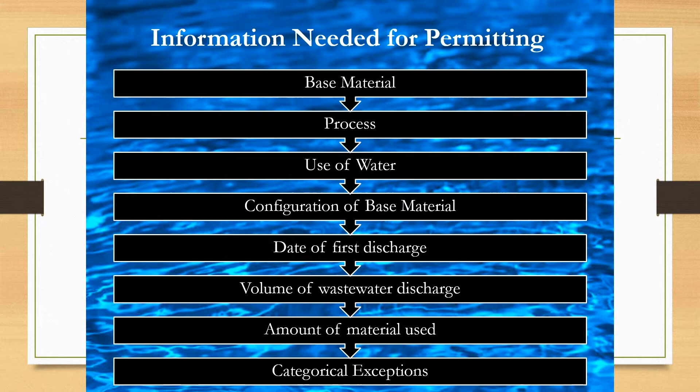One of the things I like to talk about anytime I talk about understanding a business is breaking it down to what you really need to do during an inspection. I like to break it down to the smallest thing, so some of you who have never done it, or have only been doing it a year, understand the basics. One of the most important things is you may need a permit. So you need to understand what you're looking at.

I always like to go over: what's the base material? What process are they going to perform throughout the whole thing? What's water being used for? The configuration, if we're talking metal finishing or what metalers do. What's the date of the first discharge? Is it a new discharge? Is it one that's been doing it for years? Or have they changed their process so all of a sudden it changes that?

Amount of material used is very important, or volume of wastewater discharged, or if there's any exceptions once you understand what you're looking at. Because there are always a bunch of categorical exceptions that some people miss. I know I did, until I was questioned about one of my industries and found out there was an exception, and that's why they fit into that category.

So, of course, I want to go over safety. Slaughterhouses are a very dangerous place. You got knives, you got hooks, and these can be in spots with wet floor, very important. I've seen hooks right here on the ground holding meat and everything else, and it's like, oh, wet floor. That could be an accident waiting to happen. And what I also forgot to include, acids. They're using it for sanitation. So there can be that.

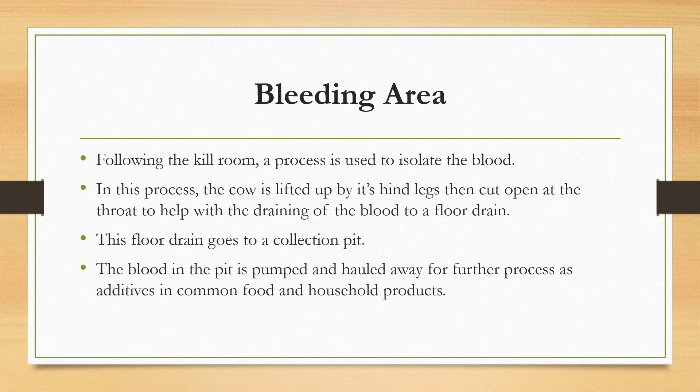And of course, you don't want that down the drain because what's blood high in? BOD. The other thing people don't realize is that's a usable product for them. I really didn't understand this until I took a course on history and economics. A lot of these places don't make much of their profits on the meat itself. They almost sell it for cost. A lot of the other byproducts is where they make their money.

And that's the stuff I'll try to show you and tell you about. So like this, they have a special floor drain that goes to a pit. Like I said, this is the bleeding area. A usable product that a lot of people don't realize is in many of your products already is cow blood. I won't go into it because you can do the research on your own, because some of the products you may not want to ingest anymore.

It's to change color, those kinds of things. But they save all that blood to haul away for further processing. So it is a usable product for them. Next, they will cut off the head. They'll remove the head, and they take it out for testing. That's when you start hearing about these places having mad cow disease, because the FDA is very worried about stuff like that.

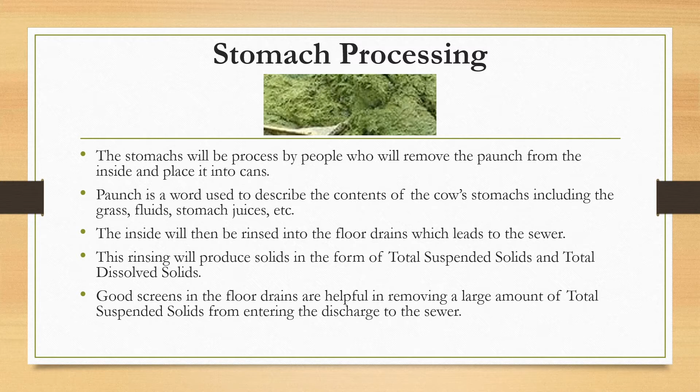One of the things that they do process, at least at my facility, is the stomachs. And they have to, of course, pull all the material out of there. This stuff's called paunch. This is all the acids, all the grass, all the material the animals consumed. It kind of looks like this, as I turn off the projectors. So it's this green stuff. Here's where your TSS comes into play. You've got these fine particles of hay, grass, and other things that these people are feeding them.

Luckily, like I said, now the slaughterhouse has gone away, so we don't have to worry about telling them, guess what, you can't take it from that farmer that's putting that stuff on there. But that can be a concern. And like I said, the TSS is a big deal. The facility I was dealing with had a huge surcharge for BOD, TSS, and oil and grease. And they didn't have much screening in their drains. They weren't capturing enough of this paunch material.

I went in there, saw their floor drains, and I'm like, why aren't you capturing this inside? They were like, well, no one really mentioned that. We have grease interceptors outside that will catch solids. But it's like, well, you're paying a company a lot of money to pump out your grease interceptor when you can capture a lot of it right here. The reason I mention this is we do it for a lot of our restaurants.

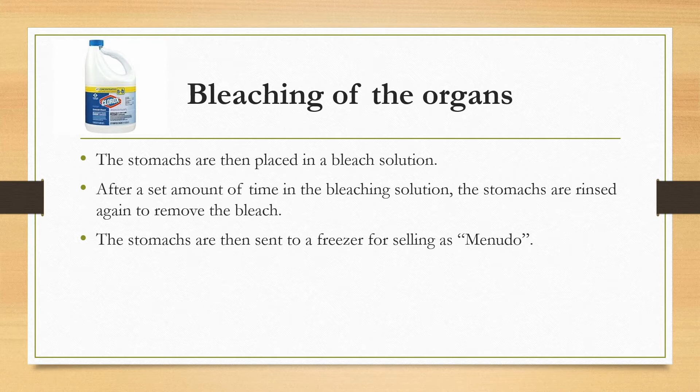Because the thing they're going to make out of it is, who's ever had menudo? That's what menudo is. That's cow stomach. That's your meat in that. Kind of interesting fact. Made me not want to try it, because I saw how it was processed, but that's just me. Maybe you won't notice.

The other thing, when they're cutting these open and they find all the organs, they'll actually find baby calves sometimes. Yeah, it's sad that you're losing this calf, but they find ways to reuse these calves. When they pull out a lot of the blood, since the calf is still developing, they actually pull out the stem cells. We've all heard about stem cell research. Regrowing nerves, regrowing limbs from stem cells. This is where the research comes from.

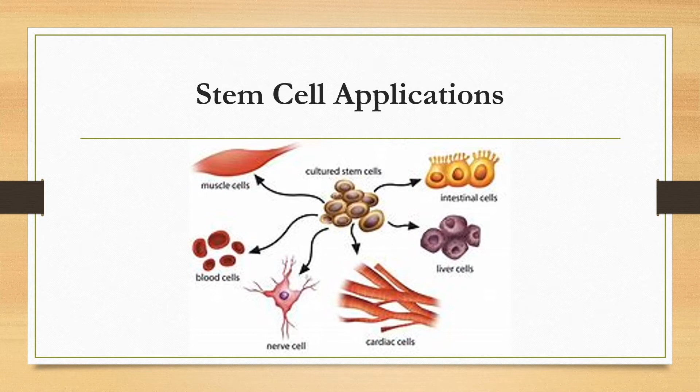They sell this to universities and everything else, so yes, you're losing that calf, but guess what? They're sending it out for stem cell research. That could be revolutionary eventually. Because stem cells can change into anything, depending on what it goes into and what it stimulates. So it's kind of nice that that's where the research comes from.

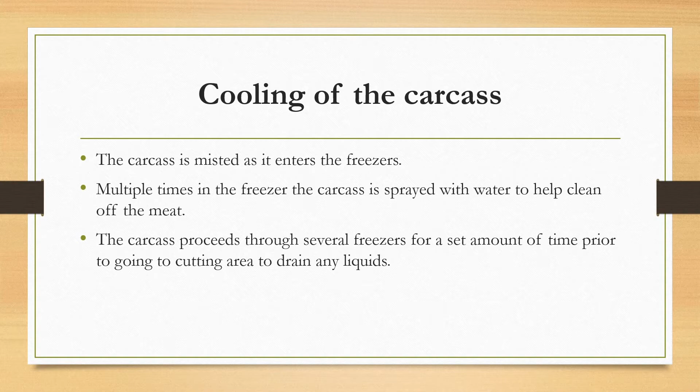So now that everything that isn't being used has been cut off, like the head, the hide, the organs, now you're down to really the meat. Throughout that whole process, they're rinsing it off. Now they have to set it into coolers. They'll actually spray the carcass with special chemicals, so no bugs come near it. And it's safe for meat, because they're going to eventually rinse that off in other processes. It may sit there for a couple days in coolers to keep the meat below the temperature it's supposed to be.

After it's been sitting for a while in these coolers, it's sent off to the cutting room. Again, this is where we're going to get more solids. We've really got down to the point there's no BOD really from it. So now you're to the cutting room. This is where, depending on who's buying the meat, they decide what cuts they're going to do.

So they'll take some of it and just send the whole half basically right out the door, depending on who's buying it. Or they'll cut it into the different types of meat you want. You want ribs? Okay. They're going to cut it for the customer they have. And there's a lot of floor drains in this area because they've got to sanitize later on. And I'll get into that a little bit more later on, about the sanitization of this process.

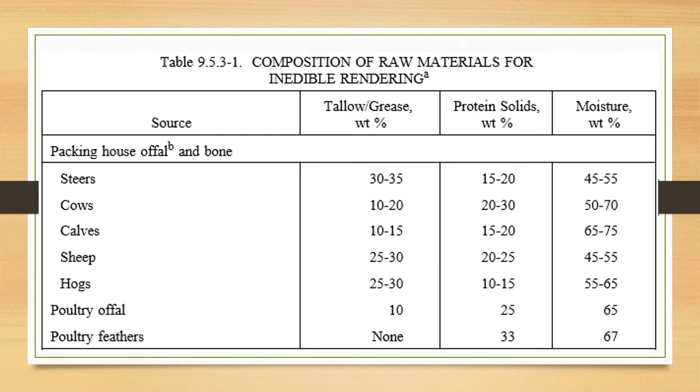So, like I said, most of the water was used during the daytime when they were cutting up the meat. Their operation runs Monday through Friday, pretty much 24 hours. But they can only do about 16 hours of processing. At that point, the FDA and everything says you cannot process anymore. Now you've got to do sanitization. So they send most of their workforce home, because everything now has to be sanitized for the next group of cows.

So nightly for about 8 hours, they are scrubbing every single portion of that facility because you never know where the blood went to. As the guys are cutting it, there's blood, and they're walking through the facility. So they have to sanitize everything so they don't cross-contaminate the meat. I can't remember if I have on this presentation the number of workers, but they had, I think, a crew of between 10 and 16 guys that just sanitize at night for 8 hours.

One of the things that I also wanted to point out, this facility actually dipped their hooks in acids. They'd actually take acids and hurry and dip their hooks in and stuff like that. So that's why I said the safety on, basically you could be around a 55-gallon drum of acid that they're using to clean their hooks with.

Luckily, since it's just an acid cleaning process, it's not a metal finishing process. They're not doing it to basically form that layer. They're just putting it in to hurry and clean it and sanitize it really quickly. And they'll let it air dry off. And they'll actually put it over the acid drum so they collect the material back as much as possible.

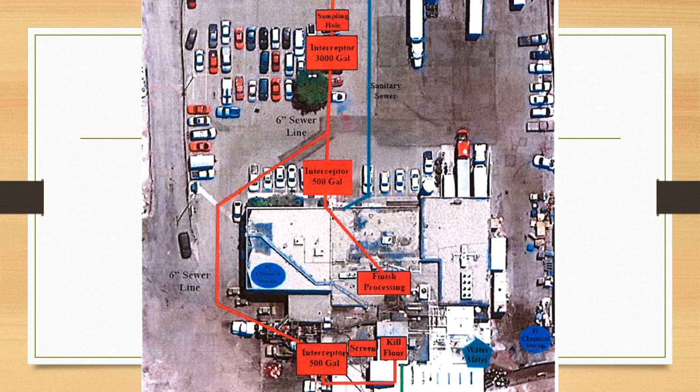So I like to show this whenever I talk about grease interceptors. Until you visually see what it actually does, it helps to understand. I do tours at my facility. This is how a grease interceptor works. You go to a restaurant, here's what it's going to do. Since food has a higher specific gravity, it's going to fall to the bottom. Your fats, oil, and grease, lighter, guess what? They go to the top.

And I like to show restaurants this when I can, so they understand what's going on out there. As the flow goes through, it's just going to slowly fill up and settle out material. And the better you refine your designs on what you allow, it will help your lines out better.

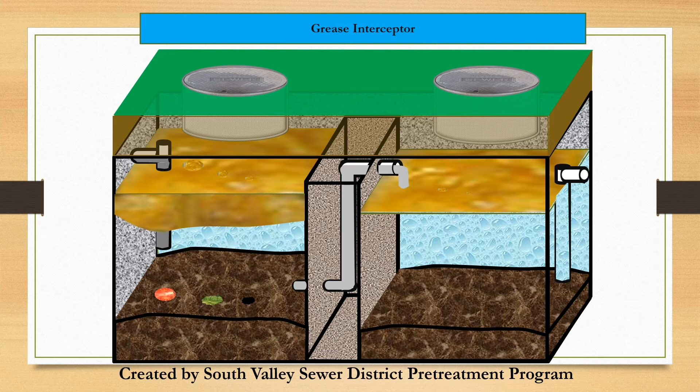And actually, most of the time I just take a picture of this overall to show them. Because as I'm explaining it to them, they look down and all they see is sewer manholes. So it really helps out when you have a picture of what they see on top of a restaurant or a place like a slaughterhouse of, you have a grease interceptor. Do you know how it works? No, I have no clue how it works or what's going on.

When you start explaining, well, this is really just a detention tank to basically slow down the flow for this material to settle out. Oh, really? Okay. Helps them understand if you have to regulate them for it. Or when their numbers are high, why their numbers are high based on if the pumper's not doing right. Because like I said, if this is a 3,000 gallon and he's only getting 2,500 of it, there's all that material on the bottom. And when you start seeing the TSS numbers on the slaughterhouse, that 500 gallons means a lot to him.

So with this maintenance, and this was quite an expensive maintenance program for this facility, every Monday they would have the 3,000 gallon interceptor pumped. Basically every Wednesday they had both 500 gallons pumped. Pumper was happy. They had basically a stable business. Business wasn't happy though, because now he's paying for every time these have to be pumped out. And when you see the surcharge amount, I don't blame him.

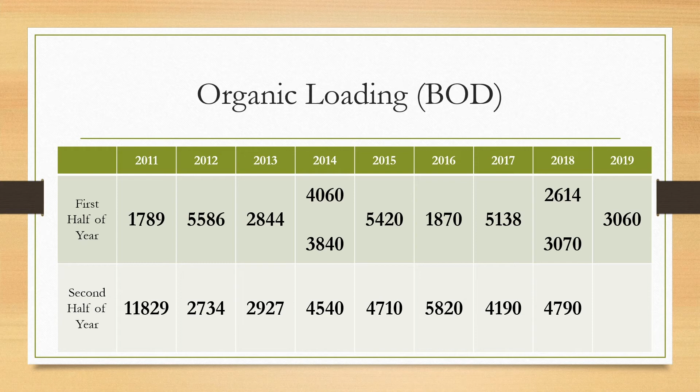The other thing you have to worry about, we're talking chemicals, and some pretty nasty ones for sanitization. You may not just want to do BOD. Because what happens when you have very harmful chemicals and you do a BOD? The numbers can come out low, surprisingly low, depending on what chemicals they're using, at what time, and how much they put down the drain. So we actually went to a COD and a BOD at the same time to see if they were matching. I had learned this when I worked for Salt Lake City, when we were doing soap manufacturing on a facility.

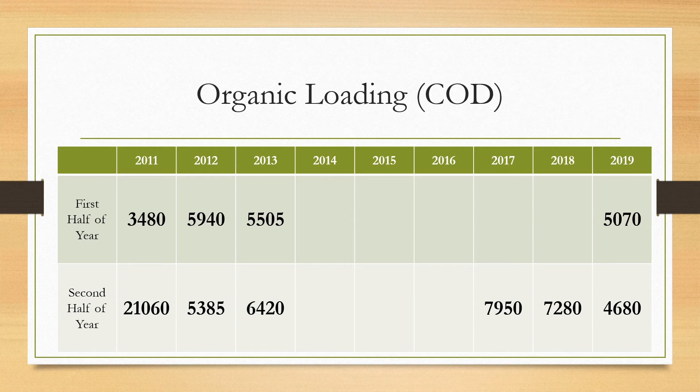The previous people there had only done BOD. Well, guess what? When you start understanding the soap manufacturing regulations, there's a correlation between BOD and COD that has to be maintained. Basically, if it's beyond 1 to 2, they violate. And that's what got me thinking about this with most industries. What are they using to clean? If you're just doing BOD, could your BOD end up low because of the chemicals they're using?

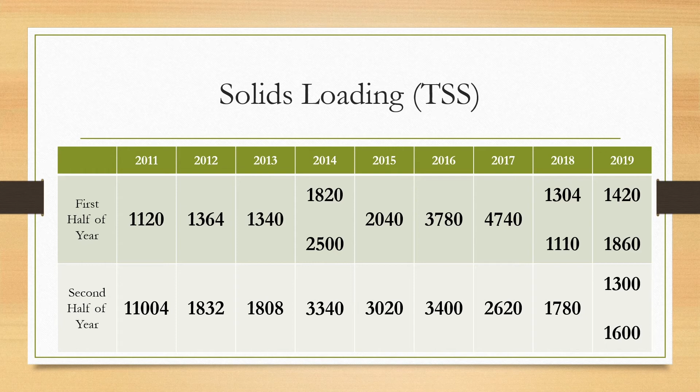I like to compare it to, basically, everyone probably played with Play-Doh. If you ever played with that spaghetti line on it and stuff like that, I compared those screens to that. Basically, the more pressure you put on it, the more material is going to keep going through those holes because of the pressure behind it. So the more they clean the screens, the better their numbers end up.

And you can see the most recent TSS loadings. And when you're talking money, like I said, there was a lot of money going to us for what they were putting down the drain. This mattered. Because all they have to do on this is basically buy the screen once, for the most part, for years, and make sure the employees maintain it.

Yeah, it's kind of interesting on those screens also for my restaurants. So we actually decreased the H2S at our plant since I've been at my facility. The way we decreased our H2S is by helping decrease the solids from grease interceptors. And the way we decreased solids from grease interceptors and everything else was having restaurants put screens like that.

Because that was the correlation of food breaking down: the bacteria that's eating up the food produces H2S, which would go into our lines. And we've seen a huge decrease in that kind of material in our lines. A lot of the interceptors we used to sample before, no H2S, compared to previously there were quite a bit of readings. So, like I said, these screens help them out quite a bit as we get into the others.

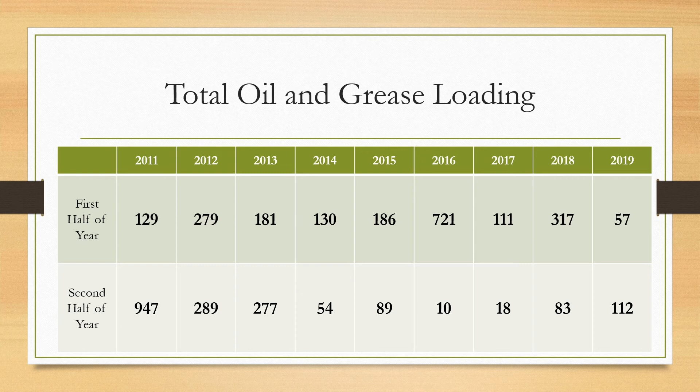Because a lot of those gravity ones are based off of a 25% rule, at least the manufacturers say. Well, if you fill up 25% with solids, guess what? Where does the oil and grease have a place to go? Because it needs that 75% to settle out that material. It goes right through. So the more food you keep out of there, the better your grease interceptor runs, which is shown.

As far as petroleum, since there's a lot of products around there running the ACs and everything else, we did see a few hits on there that were over our limit. Because of how our facility handles BOD and TSS, we really don't have a BOD TSS limit, because we're nowhere close to our loadings. So that's why I didn't say there was really a BOD TSS, but as far as petroleum, we are worried about that. So they did have a few blips on that.

They did figure out that it was probably one of their products that they were told was food grade, had some petroleum products in it. Because they were trying to use stuff that was all food grade. They tried to change over, other than their acid. Everything was supposed to just be food grade. They did look through it and figure out, after the second one, it must be this food grade product we're using in our machines.

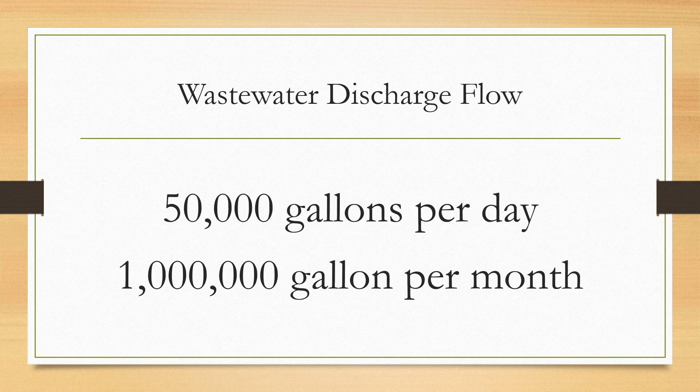So this facility uses about 50,000 gallons per day of water. That's a lot of water, especially for a 3,000 gallon and two 500 gallon interceptors.

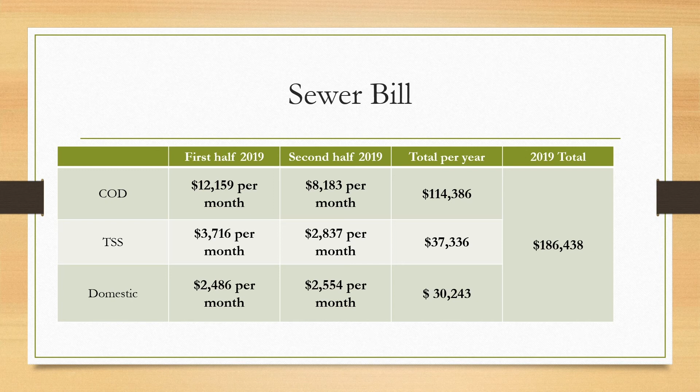So it was about 1 million gallons per month we were receiving. So when you start thinking of that in the BOD, COD numbers, wait till you see their bill. Here's their sewer bill. So on COD alone, $12,000 per month. TSS, almost $4,000 per month. Their domestic was $2,500. That calculated to, in 2019, they paid us $186,000 for sewer service.

Number looks great for our accountant, but the thing I worry about facilities is, as this facility has left my area, they basically contacted almost every city around my area to change over. Every time an accountant sees this number, they're all on board. Come to our city. Come to our treatment plant. We're happy to accept your wastewater.

The question is no one's ever seen the other numbers, so every city had to contact me going, I want all their numbers on how much waste strength, how much they're going to put down as far as pounds of BOD. Can my facility handle it? So far, I have not heard that they've got a new place to go. Because every facility around mine is like, hey, we can't handle that much.

And that's why I say, some of these variabilities also, how many of your plants can handle variable loads on waste strength? Depending on your small facilities. If you're a large facility, yeah, you can handle it. We could handle it. I had no problem handling it. But I worry for the small communities these have to move to. Can your plants handle this?

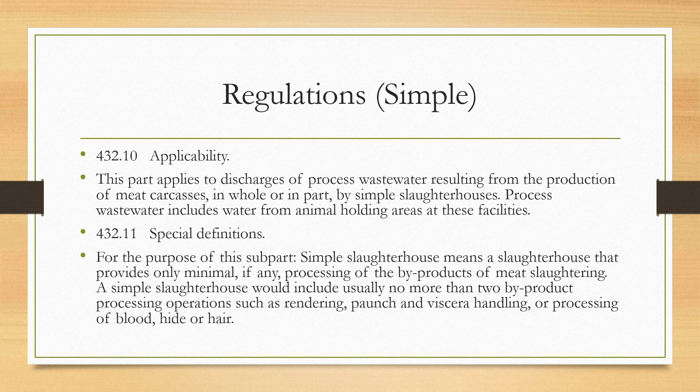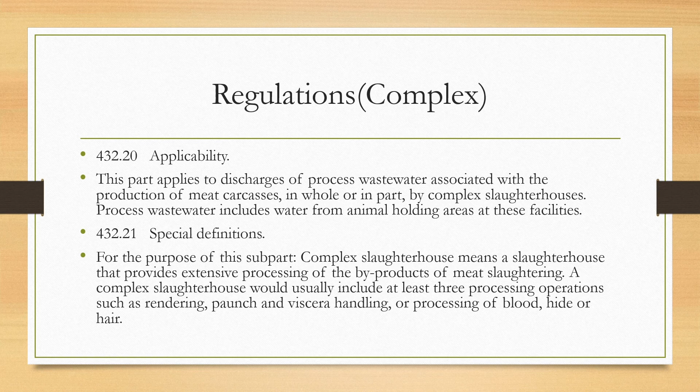Simple, pretty easy. 1 or 2 processes only besides the meat cutting. Is it removing the paunch? Is it rendering? Is it making the soap? What is it doing? That's why I say worry about this kind of stuff. Is it complex? Because, like Sarah was saying, if you go to permit them, you need to understand your justification. If there are regulations on this, you need to explain why you did what you did, which category you put them under. Complex, are there multiple facilities? Are they processing quite a bit?

So luckily, slaughterhouses are reserved. Hopefully everyone knows what reserved means, but it really just says there are no regulations currently, at least for POTWs. But if you're a state, there is. So for most of us, we're pretreatment, so we don't have to worry about it, at least for the regulations as a CIU. Mine, I had to worry about it because it was an SIU. 50,000 gallons, above 25,000 gallons. Guess what? Automatically made me have to regulate them as an SIU.

So, like I said, mine was flow, but you never know. If they're a smaller facility, could they be organically loading you? I've seen multiple places that had to regulate that way because of the BOD. We actually had one facility when I was in Salt Lake City. They made those apple and cherry pies you buy at the gas station. The glaze on those. We set out our sampler, pulled it up, and usually it comes out cloudy. This was almost crystal clear water. I'm like, wow, this is probably going to end up pretty good.